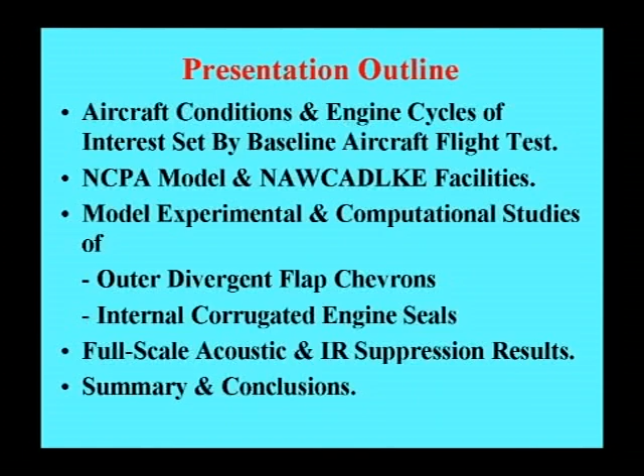If I use the word FCLP, it stands for Field Carrier Landing Practice. So the flight test...

determined our model geometry parameters. Unfortunately, one thing we couldn't get in full-scale testing was the 414 engine. That would have been better for us because we would have been able to demonstrate a larger amount of noise reduction. We ended up with a 404, which has much lower pressures and temperatures, and there's only so much noise reduction you can get out of that. But nevertheless, that was our full-scale test.

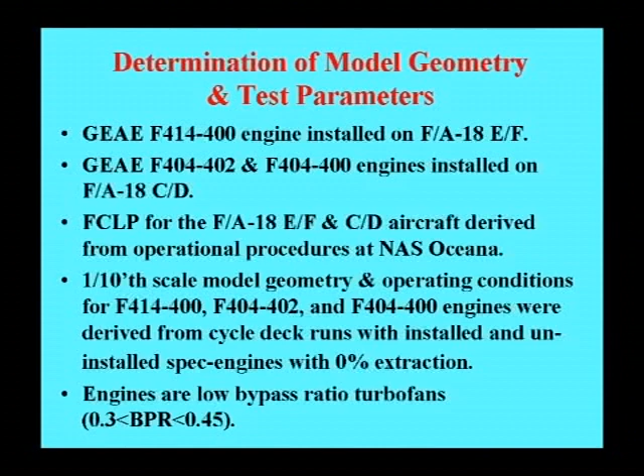The 10th-scale model geometry was like this, and we were able to run engine cycle decks and develop parameters for testing on the models. Just to point out, the engines we're dealing with are extremely low bypass ratio engines, which is why they're so noisy. I've listed the bypass ratio there for that engine.

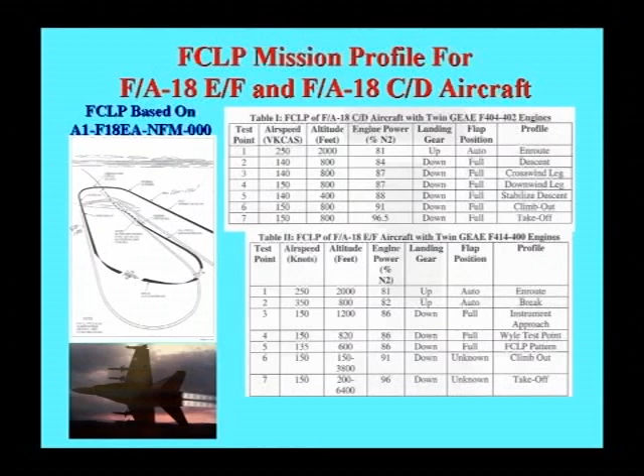This is the mission profile they run when flying the aircraft. These are tabled for the two different types of engines, the 414 and the 404. There are specific things that are done, and from those you can extract the parameters one needs by running the engine cycle deck for the aircraft.

We actually, I'll just point out, over here, is this a pointer? Yeah. Oh, is it in its case? Well, okay.

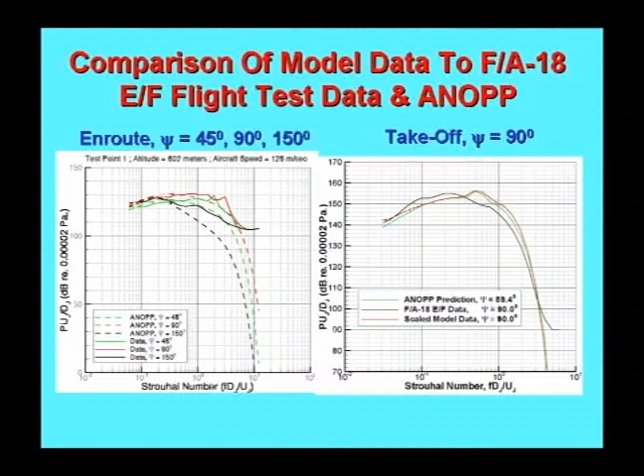So it shows that we were satisfied that what we measured in the laboratory might actually have some realistic characteristics. Now, these are the experimental facilities. This, in the NCPA, we have an anechoic room, and this is one of the nozzles that is up there. And it allows us to study these tenth scale models, and we can run temperatures of up to 2100 degrees Rankine.

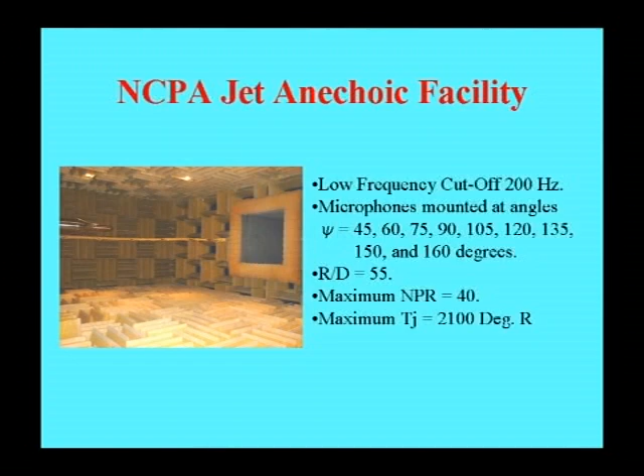What we did is we constructed hardware. We had a propane swirl can combustor for getting the temperatures, but the nozzle hardware that we constructed, this is a typical engine cut from the center body on out through the convergent and divergent flaps. And what we constructed in the laboratory was model geometry that was very, very similar to the actual engine.

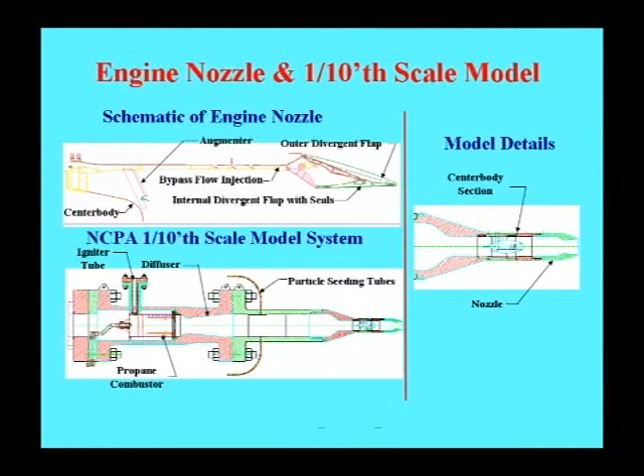The only thing that we didn't do is we didn't put in an augmenter, so that wasn't present in the model testing. This just shows some examples. The things that we did at the NCPA in comparison to Florida State looked at microjet water injection.

We were looking at modifications that we can make to the engine nozzle that are practical and something that you could actually accomplish. One of them was to actually modify the engine outer divergent flaps with chevron-style devices that would project into the flow. And this is how we did this in model scale.

And we also studied chevrons that were in the flow that actually were ported, where we could also spray water at the same time to try to get a larger reduction without having as much thrust loss.

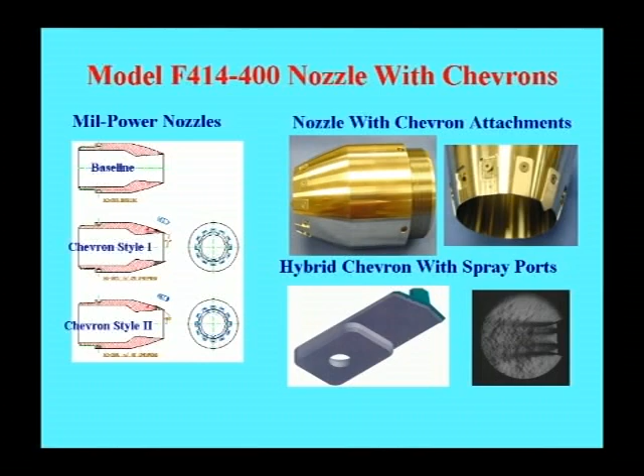One of the other modifications that we looked at doing was to modify a thing - I have a better slide that shows you this, but in general this slide shows where these parts are. And all these engines have seals that cover the divergent flaps on the interior to keep the engine from burning up and also having air flow through the flaps.

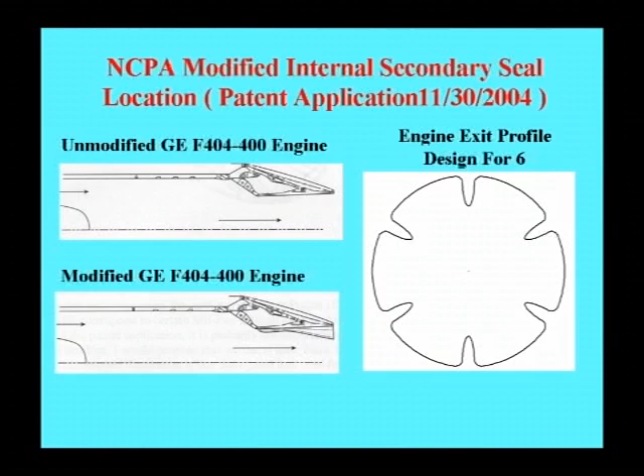So the seals, this is a typical cut, and what we did is we redesigned the seal to look something like this in locations around the engine like that. And in general, the idea is that these seals are based on a method of characteristics design.

There are two things we wanted to do. Getting rid of shock noise is always a nice thing to do, so that was one of the goals. And of course, when you do that, we were also looking to increase thrust augmentation through increase of pressure along the inner wall. That would be one of the characteristics of the design.

You get mixing noise reduction because we were looking at corrugating these seals and generating counter-rotating vorticity, which then should also lead to plume infrared signature reduction.

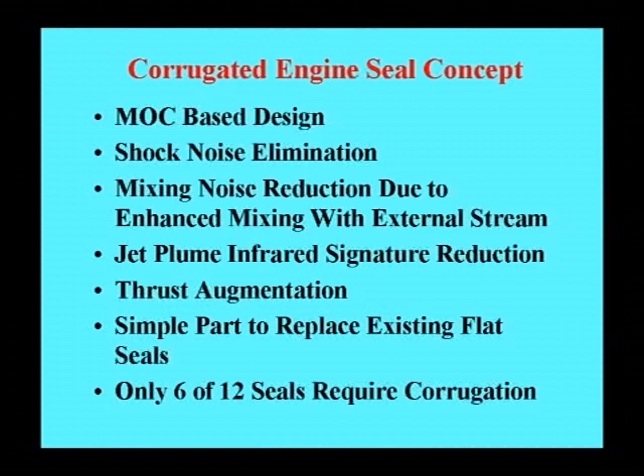And from the model testing, we found we only needed 6 rather than 12 seals. There are 12 internal seals. We only needed the best configuration, which was 6, and I have a slide showing it.

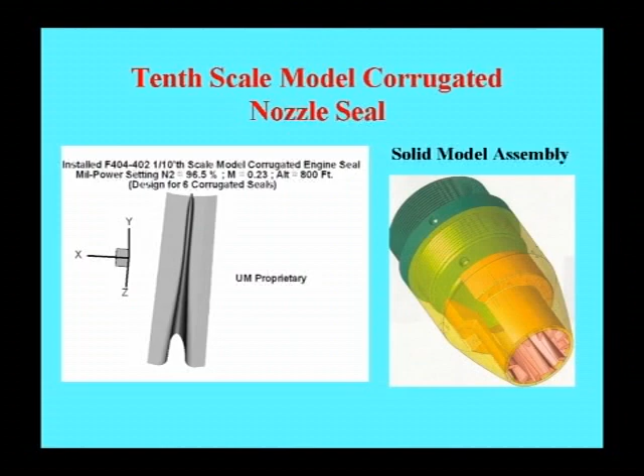So this is what we did in the model. This shows the 10th scale seal, and this is a solid model assembly of that. The next picture shows the actual model that was constructed.

Constructed and tested in our laboratory. You can see the individual seals here that would be placed into the nozzle. This here is the baseline nozzle insert.

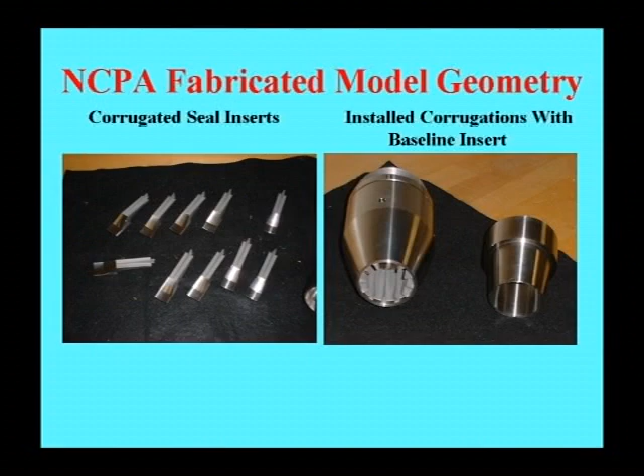At NAWCADLKE, this is a picture of an F404. I've had this picture for a long time, and I was just hoping that it wouldn't be the engine that we ended up with, and it turns out it's something like that.

It's a 404 engine. But anyway, it's on their multi-purpose test stand, and it has an ability to measure up to 50,000 pounds of thrust.

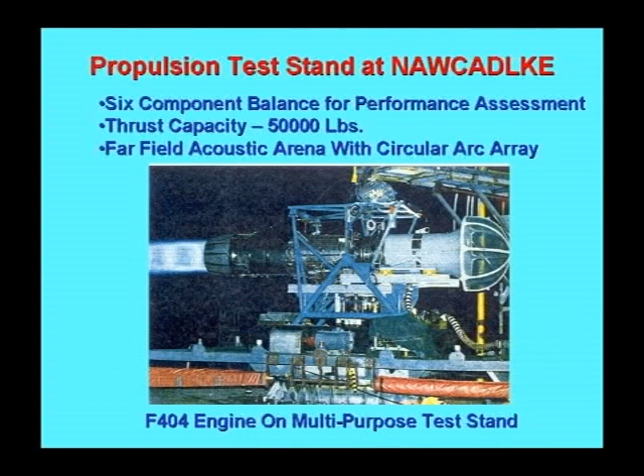But what we had to do for this particular test, when you do acoustics at the same time, you have to raise the engine centerline height up so that you don't have really shallow angles, grazing angles to the microphone. So we had to build an extra stand for this and mount their engine on that stand.

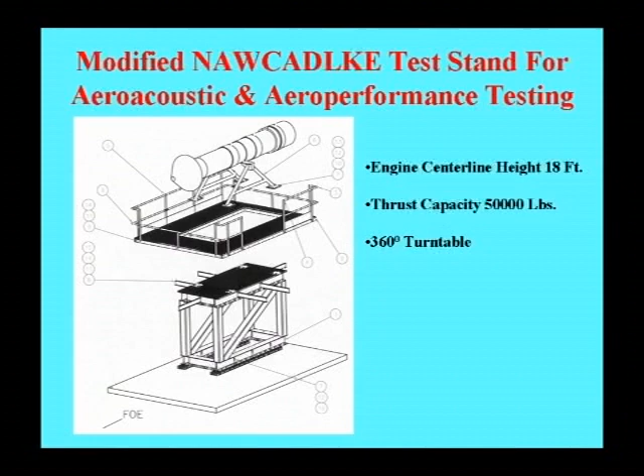And then we had to go through some calibration procedure for the balance. This is what the acoustic array looked like.

We used every 10 degrees, so there's 19 microphones on this array at 80 diameters, which is far field. And then we had an inner array of microphones at 55 jet diameters, which is equal to what we had at the NCPA when we did model testing.

And it turns out that this is good. We were able to propagate the waves from here to here with no problem. So even this distance here looks like this is in the far field.

This is the engine and this is the microphone out on the field, but you can see that the surface is fairly decent for doing these types of tests.

This stand they had can rotate 360 degrees, so it was very nice to be able to use a facility like this. Brent will spend time showing and talking about the application of nitrogen. These are nitrogen trailers, and then a water tank that was used to inject water into the engine.

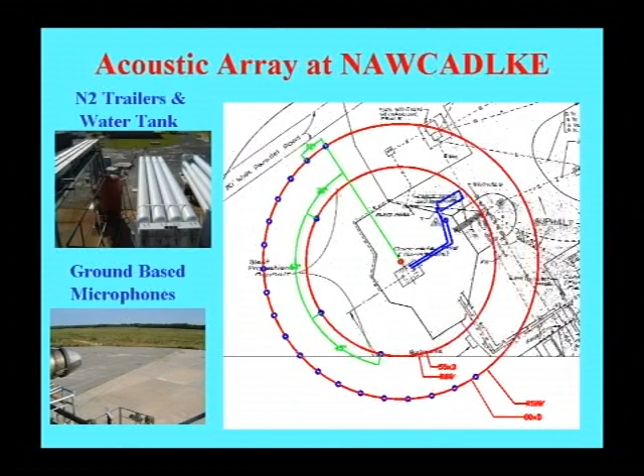All right, this is a schematic solid model of the engine seal. Now it turns out that the engine seals are different than the model seals.

That's because of a difference in what is known as the physical throat - the 1D version versus the physical throat. Because of the boundary layer in a real engine, one has to decide. So the design of the actual seal itself is different in full scale than it is in the model.

The other thing we learned when we did this is that we didn't have tremendous access to the engine. So when we went to do the test, we had to trim this part of the corrugated seal because it went clear. I think that did affect some of the acoustic results we obtained. If we had a 414 engine, there's less difficulty in being able to do that than on this engine.

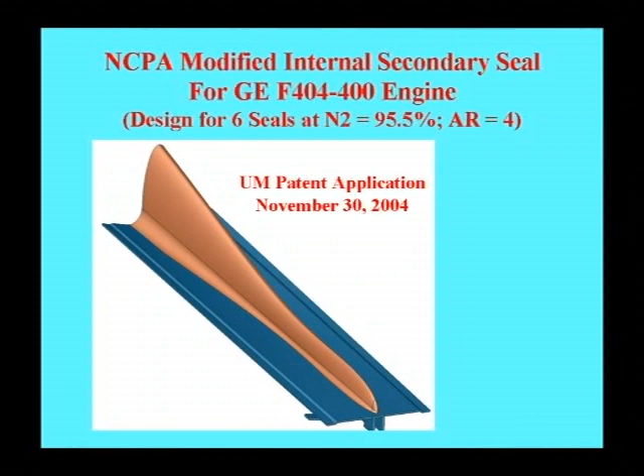All right, this is what it looked like on the stand. You can see this is the 6 corrugated engine seals. This is a typical flat seal that they use currently.

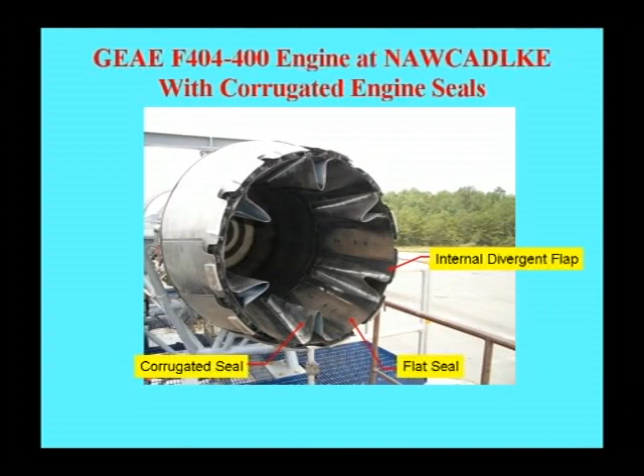I tried to draw an arrow here - underneath these seals are the divergent flaps, as you can see here. So that's actually the configuration of it. They held up very nicely during the test as well.

And then this is just a picture. We used chevrons that were attached to the outer divergent flaps. We used 12 here, and then also a version of 6, and Brent will talk about the microjet injectors when his talk comes up.

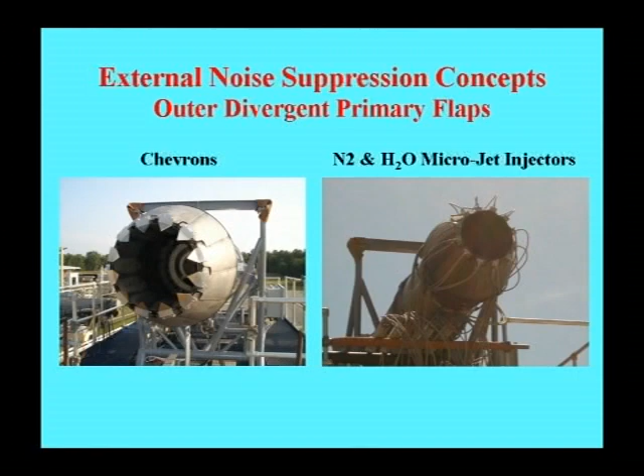Now, there were numerical simulations done, and one should always do that because one learns whether you have at least the right thought process. Now, of course, I just said that, but now what I have to say is this, and you can almost see it yourself.

The calculations had 2 different style chevrons, and what you see on the upper part of each figure is the turbulent kinetic energy of the baseline engine or baseline nozzle, and the lower part is the turbulent kinetic energy of the suppressed configuration. This actually shows there's no difference - we couldn't pick up any difference in the calculation, although the data shows that there is some difference. So one has to keep that in mind.

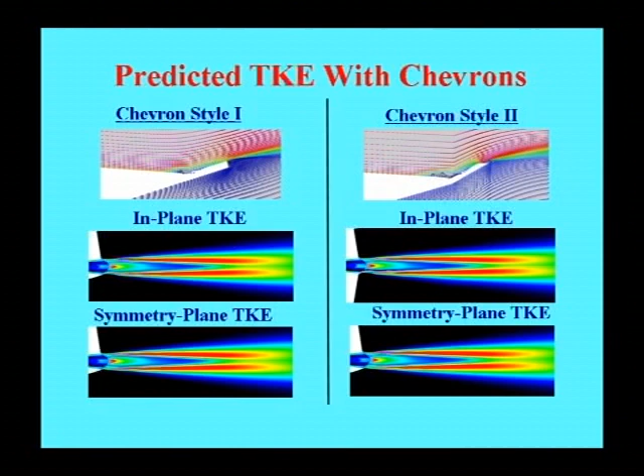That may happen. Now, in the case of the corrugated seals, they work very well. What this shows are line plots of pressure, Mach number, and so on and so forth. The goal, of course, is to reduce shocks so you can reduce shock noise.

As you can see, the upper part of the figure is the baseline engine without any corrugated seals. This is in the trough of the corrugation, and this is at the apex of the corrugation. One can see one has done a reasonable job at reducing shocks in general - they're very weak now.

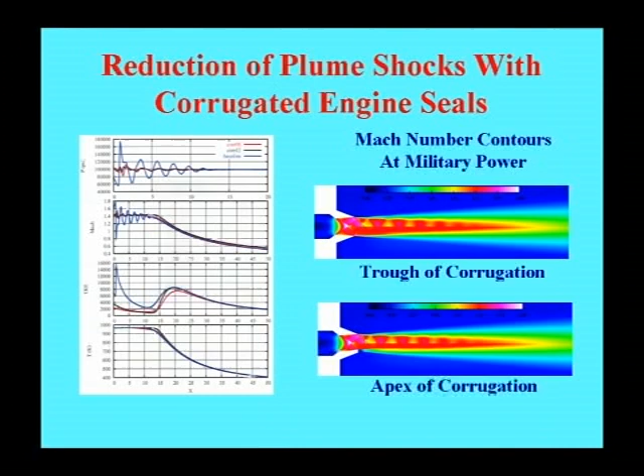And also at the same time, this is the turbulent kinetic energy. You can see, at least over the first initial radii of the jet, that there's a good reduction in turbulent kinetic energy. Now the reason that - I think this may be the next chart, it isn't - but what is this one?

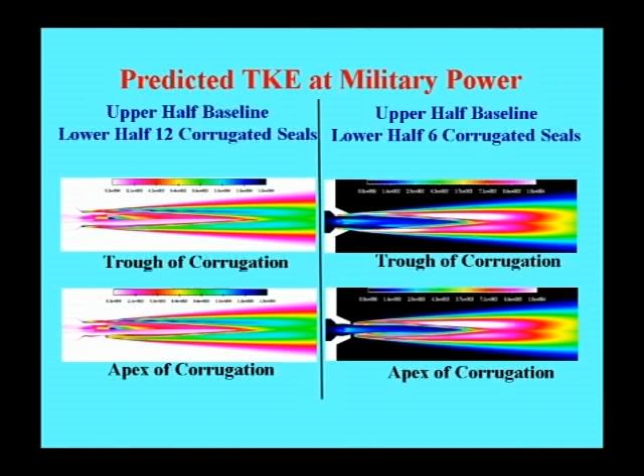This is more of the same thing with the 12 and the 6 seal. So what you see here, I think maybe I'll bypass this a little bit because I think the next one can see it a little bit better.

Now these are just at various cross planes at 1, 5, 2, and 10. What you see here is the baseline over here, and then you see when we calculated for 12 corrugated seals, and here we only have 6 corrugated seals.

And you can see as you evolve downstream - perhaps the message is this - by 10 diameters, this is the baseline engine, and the turbulent kinetic energy is very, very high. It's tremendously reduced with 12 corrugated seals, but much, much better with 6.

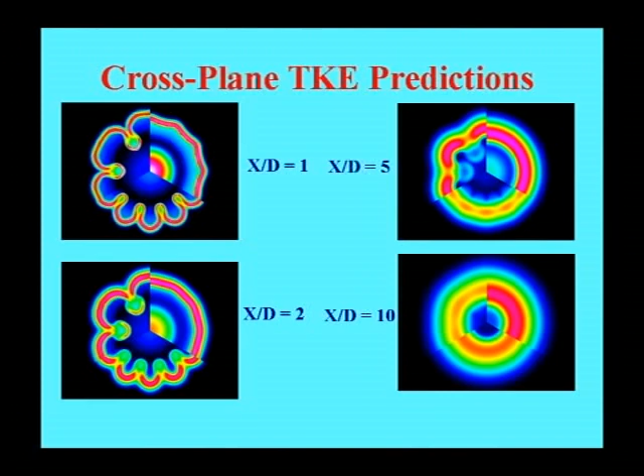The reason has to go, if you look back here, the vortices that are induced by the corrugated seals are free to grow and encompass fluid into the engine, but when they're spaced too close together, that gets shut off. So this is why the 6 work better than 12.

We found this in many other instances as well. This just shows the reductions in turbulent kinetic energy and some trial using Craig Hunter's Jet 3D code at NASA Langley to predict the noise reduction associated with the corrugated seals. You can see it does produce a few dB noise reduction.

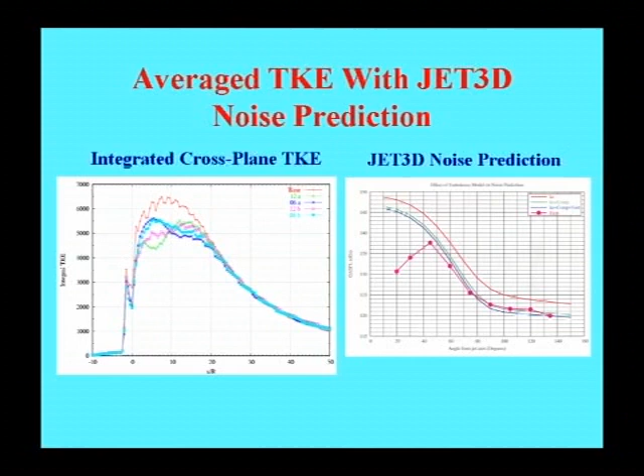Now, I'll try to go through this.

How am I doing on time? Anyone have any idea? I don't even know when we started, or when we're supposed to be done with this talk. Five minutes? That's a long time. All right.

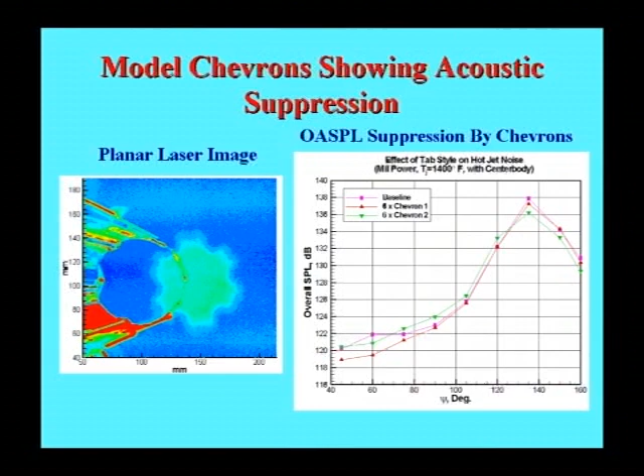So this is the tabs in the model, and the second style chevron produced about 2 dB noise reduction, and the CFD predicted about 0.5% thrust loss with that.

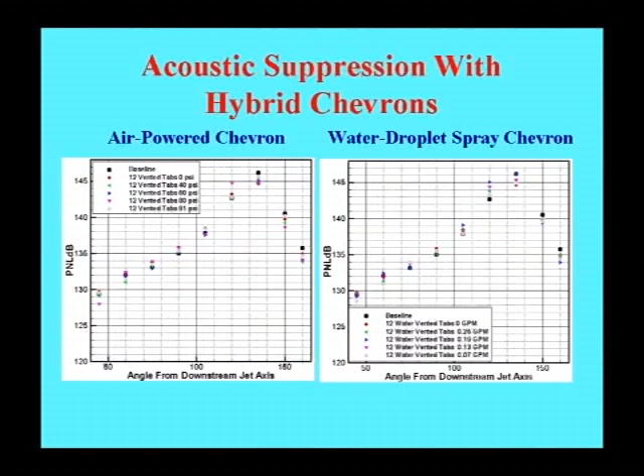When we use air-powered or water-powered spray in the ported chevrons, no change, no improvement was made with those. They need to be looked at if one is going to use that.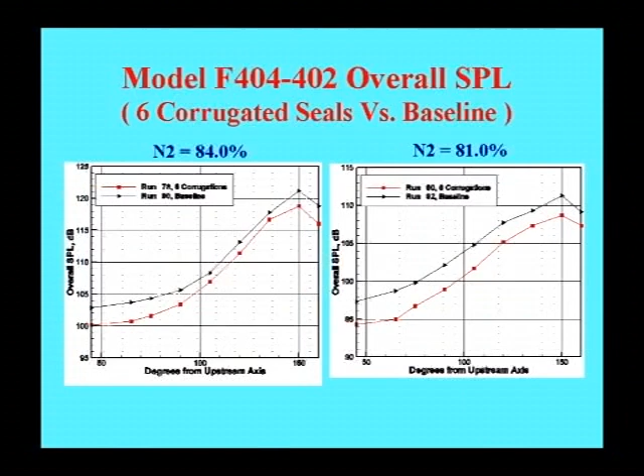These are just some other power settings, and they're in there to show that you get noise reduction at many other engine power settings, even subsonically, it doesn't do bad. The real thing is that shock noise is suppressed everywhere at all engine power settings, which was very, very interesting. This shows it right here.

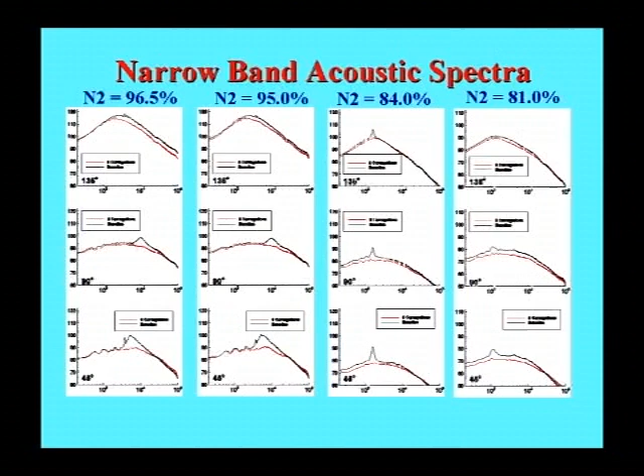These are various power settings, and you can see how the shock noise is reduced across the board, and the mixing noise as well. All right, so full-scale results.

As I said, we had some problems. We had to change the design of these because of the difference between one-dimensional work, which would be typical of the model with very thin boundary layers, and a real physical throat. We also had to cut the entrance to the corrugated seals, which probably diminished their capacity to some degree. But anyway, this shows comparisons between the baseline engine, the 8S seals, and the 6 chevrons.

You can see this is the level of mixing noise reduction. It's only 2 dB, but that's what was observed here. And this is the reduction in the forward arc, as you can see, compared to the baseline engine.

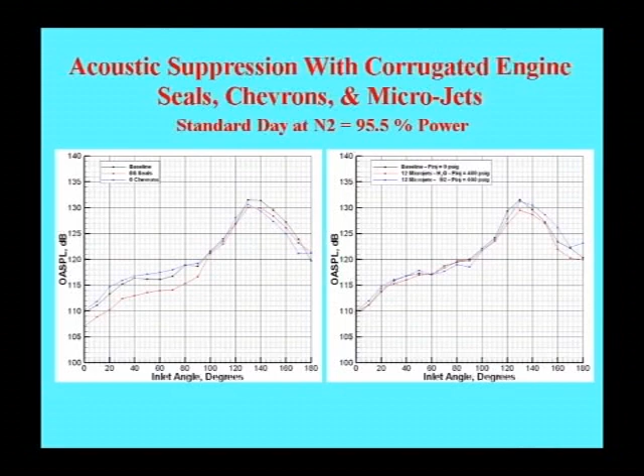Brent will talk about the results with the water spray. These are the spectra. I have to admit, I can hardly see this from here, so it must be the light. But there's a green part of the spectrum here, and this blue part.

You see tones—that's actually turbine tones. So what we did is that when we reduced the shock noise, the thing we clearly now see is turbine noise, or turbo machinery noise, in the inlet angle. We had no plan in this program to reduce that, but of course, you have tremendous opportunity in a military engine to do something about turbo machinery noise if one had some money and some time.

So anyway, these are the spectrum levels that show the characteristics in the forward arc here and in the rear arc, and the level of noise reduction that we achieved.

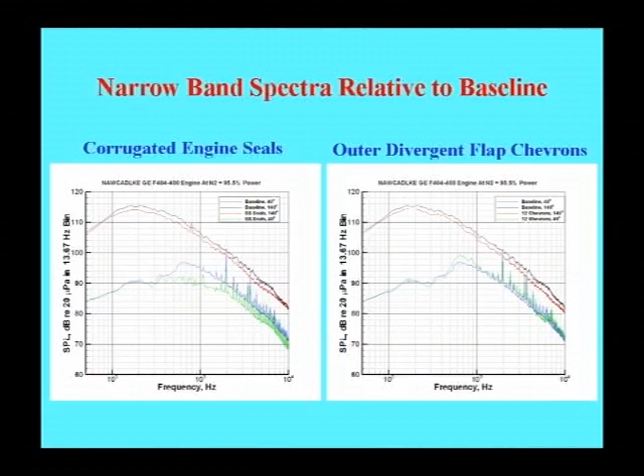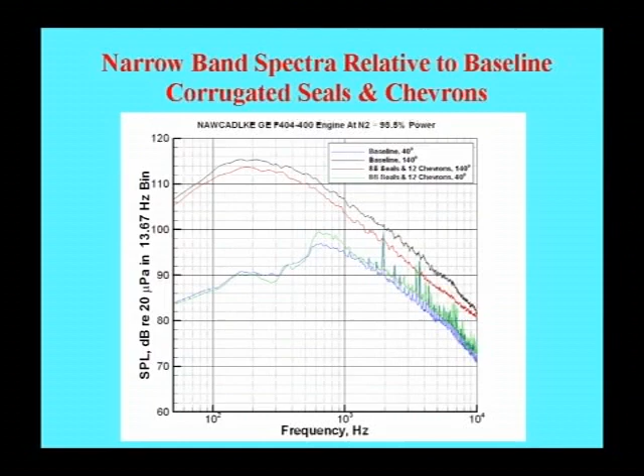This is a combination of both the seals and the chevrons. The noise reduction is a little greater, but because of the chevron's presence, there is no reduction in shock noise.

And these are IR reductions. This is the baseline engine at mil power, and then this is the engine with the 8S corrugated seals. So you can see that the IR is somewhat suppressed.

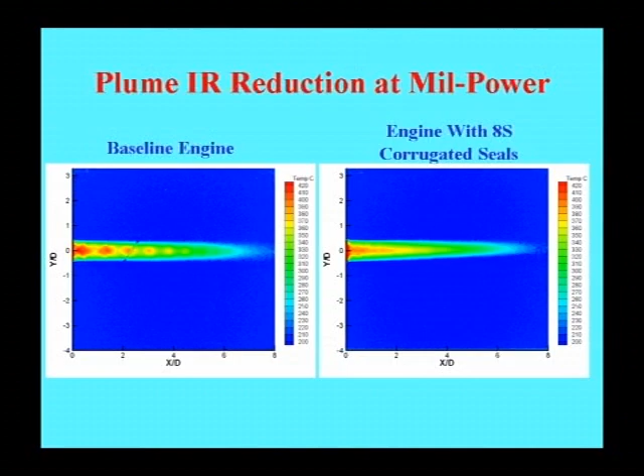All right, so let me conclude with this: we did a flight test to get the basic parameters. We built model parts, and we were looking at corrugated seals, outer divergent flap chevrons, and microjets were being studied at Florida State. The model corrugated results showed about a 4 dB reduction in the rear arc, and 10 dB reduction in the forward arc, because we didn't have turbo machinery noise to contend with.

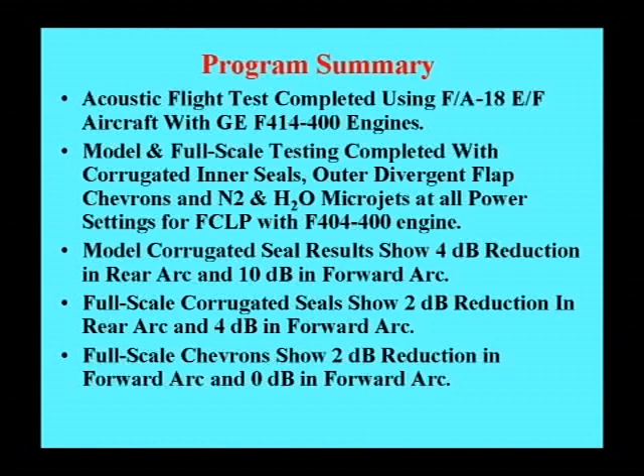The full-scale results only showed 2 dB, and I think that is due to the actual problem of fitting these corrugated seals into an engine environment. That can be corrected, however, with redesign. And the full-scale chevrons also showed a 2 dB reduction.

The calculations showed that the plume shock strength was reduced significantly, which is good—this is why you do these types of calculations. Maximum mixing noise reduction occurred slightly lower than the mil power setting. The aero performance measurement shows the highly overexpanded flow that exists in an engine really reduces the utility of using chevrons. That was actually one of our goals, not just to get rid of shock noise, but to create an environment where we might be able to do effective suppression studies. The actual engine itself has an extremely thick subsonic boundary layer.

It's very difficult to get any noise reduction that way. Now, with the corrugated seal design that we have, we've improved it, but there's much more to go. We've made it better, that's why we got the increase in thrust, but there's quite a bit more to be done in the design of that.

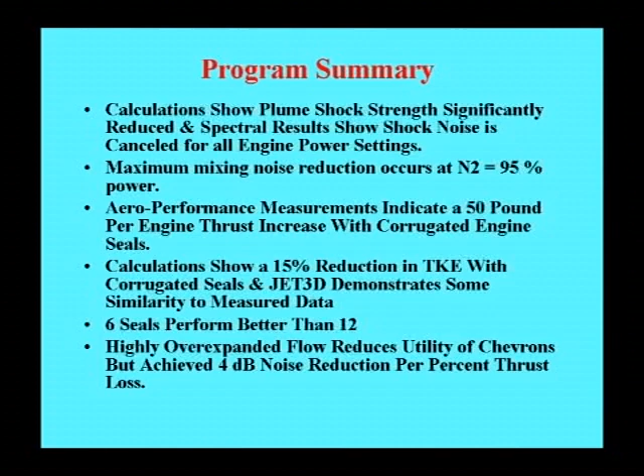Some of the future things that we want to do is to conduct model scale experiments with dual podded nacelles with full span model in the Boeing LSAF. And we would like to get an opportunity to evaluate engine performance with these suppression devices. I think that would be very important because we'd actually be able to demonstrate that we can get more noise reduction than we had with the 404 engine.

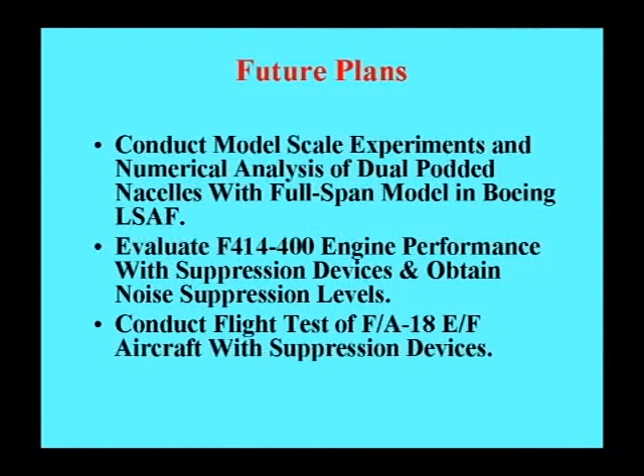And then perhaps conduct a flight test with the actual F-18. My final comment is this: it was a good program in that we were together between all partners. We were actually able to show how well the model data agreed with full-scale results, which I think is very, very important to have both elements in any program. And what we were able to do, as I've shown you, is reduce noise. We actually were able to enhance aero performance, and we also reduced plume infrared radiation. So those are the three things we wanted to do.

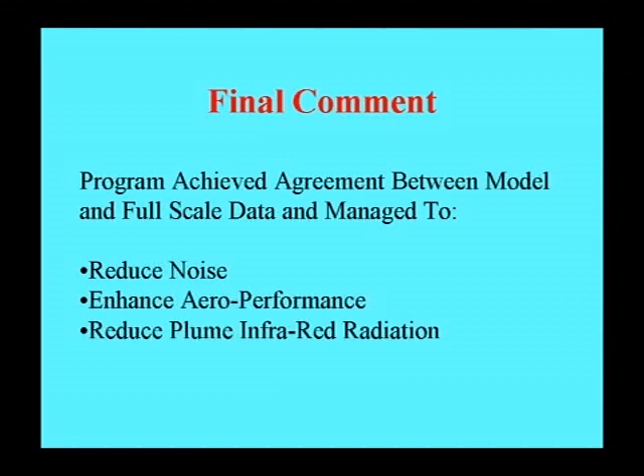So at least what we have done with the corrugated seals is we have a part that's actually very easy to implement onto an engine. On the F414, one tool is used to turn one screw. You slide them out and you put the other ones in. It's that simple. So we have a part that actually allows you to do something like that. With that, I'll stop.